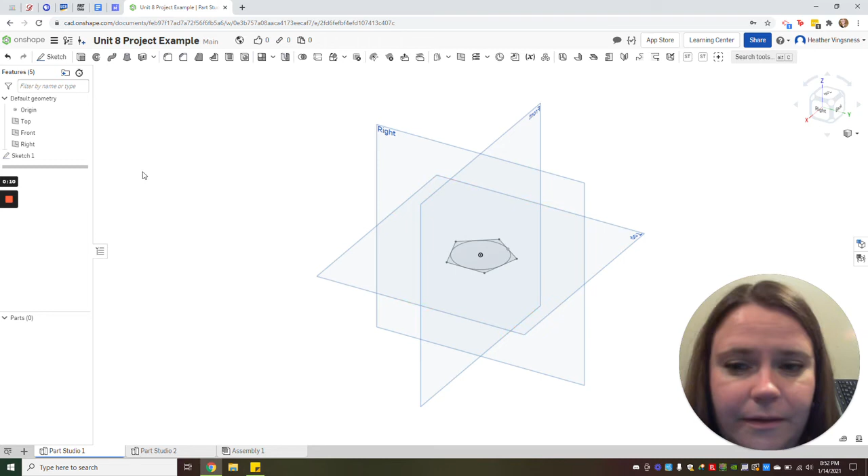Hello, I am creating a simple mold for a hollow toy. So I have this sketch right here, and I'm going to finish creating my toy. I'm going to extrude this object, and one of the things I want to make sure when I extrude it, I'm going to do so symmetrically, so that this plane right here is right in the middle. That's going to make my job easier later.

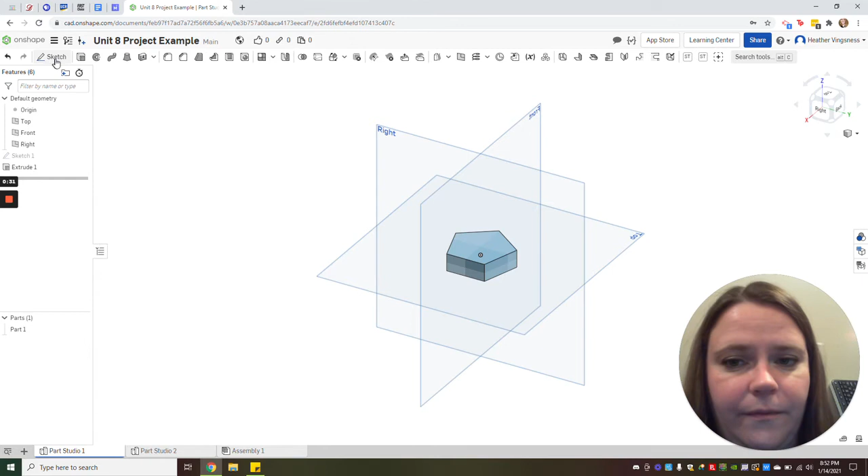My whistle right here is about 1.5 inches long and about 1/2 inch thick. I am going to create just a little mouthpiece right here, and then once I have my whistle, I can show you how to create the mold. You don't have to use this toy. You can use any toy you want. This is just an example.

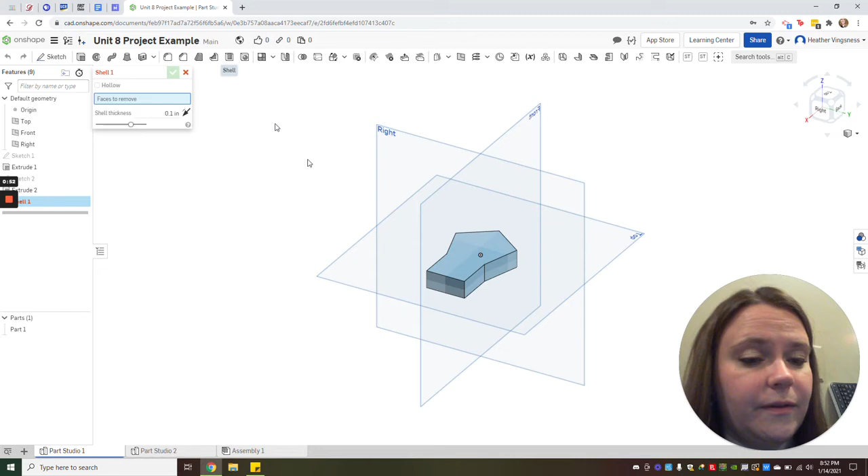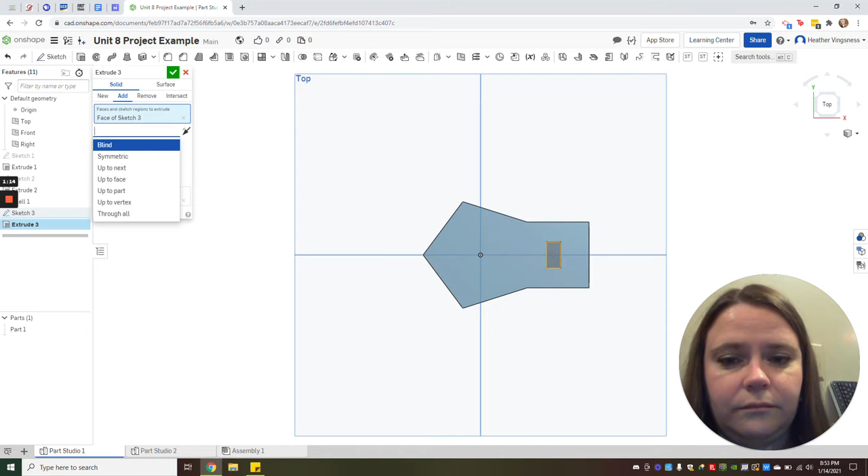So one of my requirements is that the shell thickness is about 2 to 4 millimeters. So I'm going to type in 2 millimeters. See what it looks like. Looks pretty good. To make it a whistle and to distinguish the top from the bottom, I'm just going to draw over here a little hole that you can blow through. Just go like 2 millimeters thick. Remove. There we go. Alright, so you can see there's this little hole in my whistle.

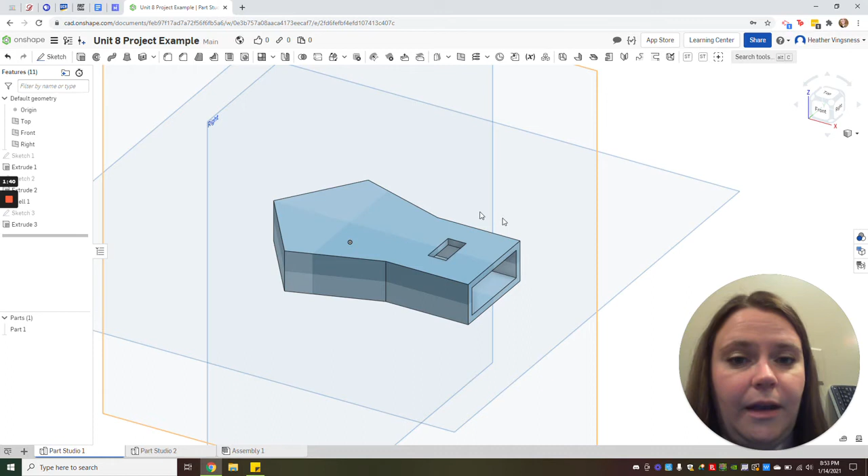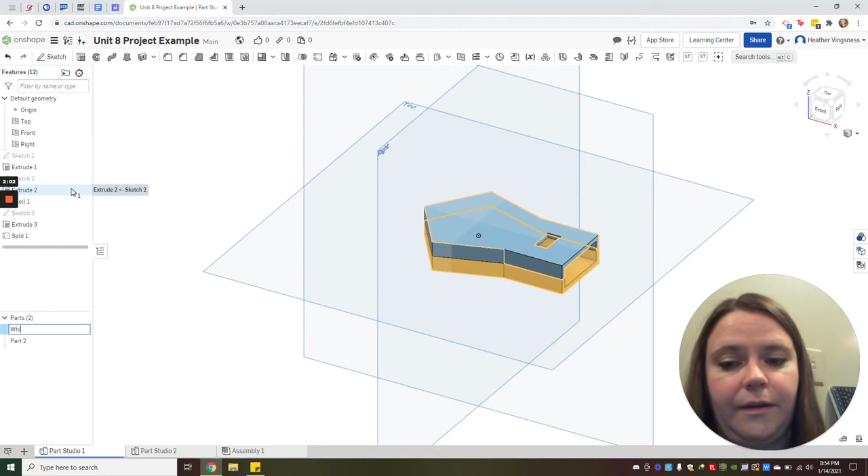Alright, so I want to split the whistle apart so I can add a rib. This is the split button. I'm going to split this whistle along this axis, which is the advantage of extruding it symmetrically. All I have to do is click this axis to split it along. And now I have part 1 and part 2. I'm going to name this part the whistle bottom, and this part I will name the whistle top. If I hide the whistle top, you can see the whistle bottom.

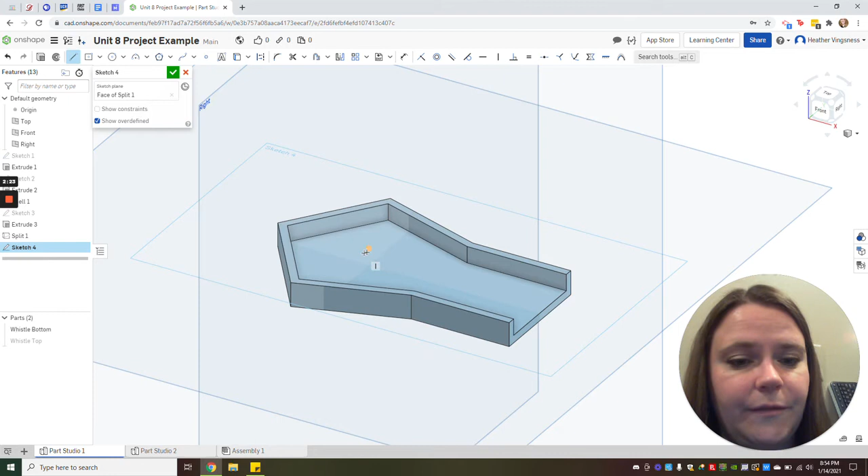So here's where I'm going to draw my rib. I'm going to draw a sketch right here along this plane, right here maybe. Since I've drawn it on this plane, I can actually use this sketch to make both ribs. So I'm going to click the rib button. I'm going to go normal to the sketch plane so it ribs down, and extend it so that it goes through the whole object.

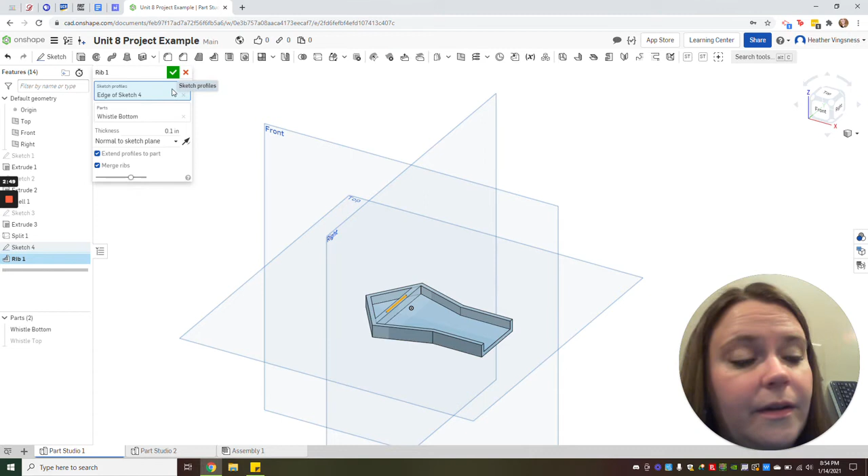The thickness of the rib has to be between 60 and 80% of the wall thickness. So I'm going to make it 1.2 millimeters thick. You can see it's really thin right there. Perfect. And then I'm going to turn this sketch back on. Now you can see the little line I drew.

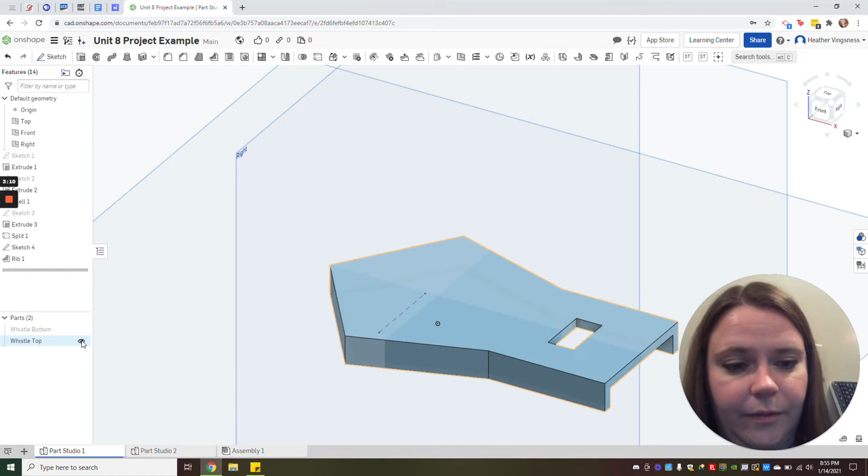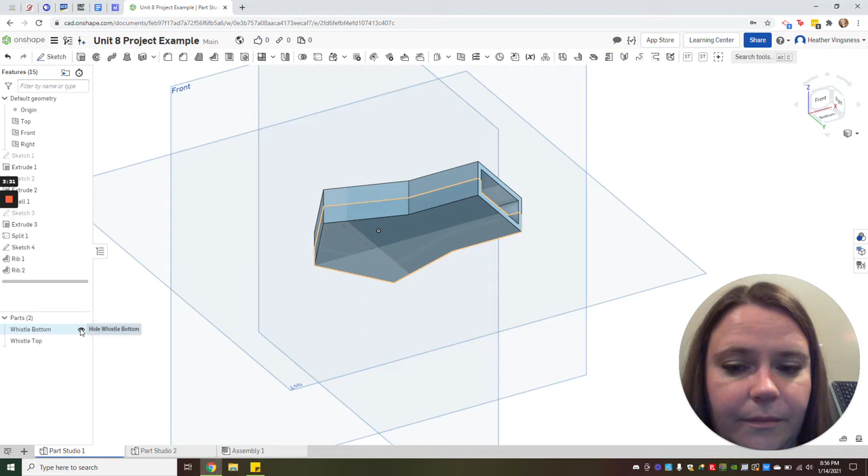I will hide the bottom and show the top. And you can see I can now use the same sketch to make a rib in the exact same place on the other half. So I'm going to click here, make it normal, make it 1.2 millimeters, and extend. And if you look, I now have a rib in exactly the same spot on both halves. Nice. Alright, my next step is to make a mold for this half, and then a mold for that half. So I guess I'll start with the bottom.

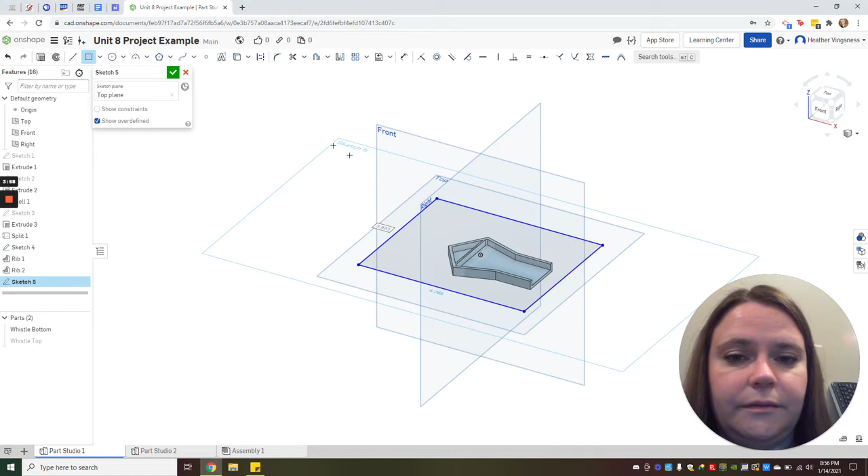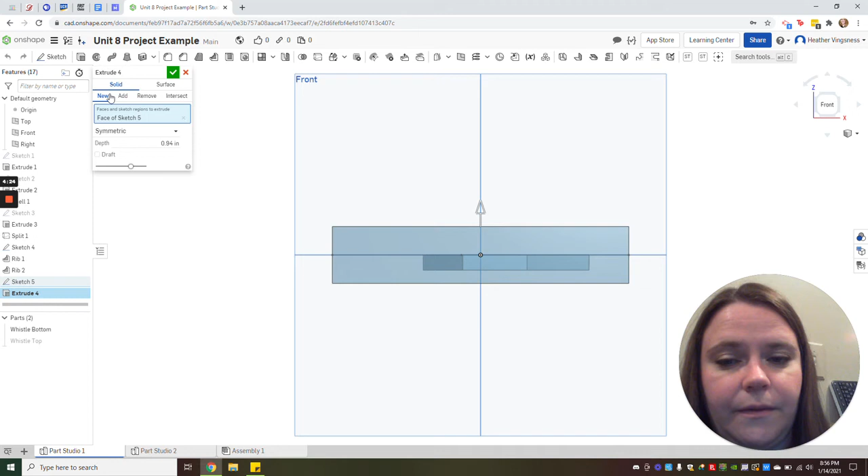I am going to start by drawing on the top a rectangle that is bigger than my shape here, and extruding it in both directions. I want to make sure that this object completely covers my shape right here. Awesome. Oh, oops, I want to make sure that is a new part. Okay, so I have a third part right here. I'm going to rename it mold of whistle bottom. Perfect.

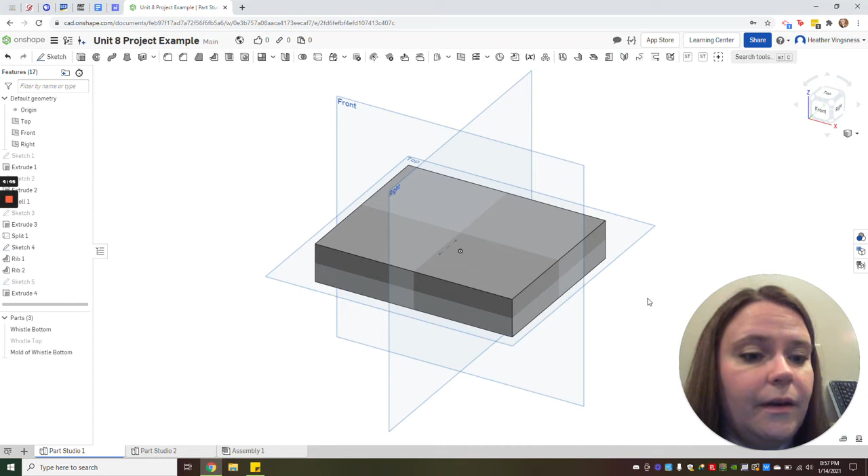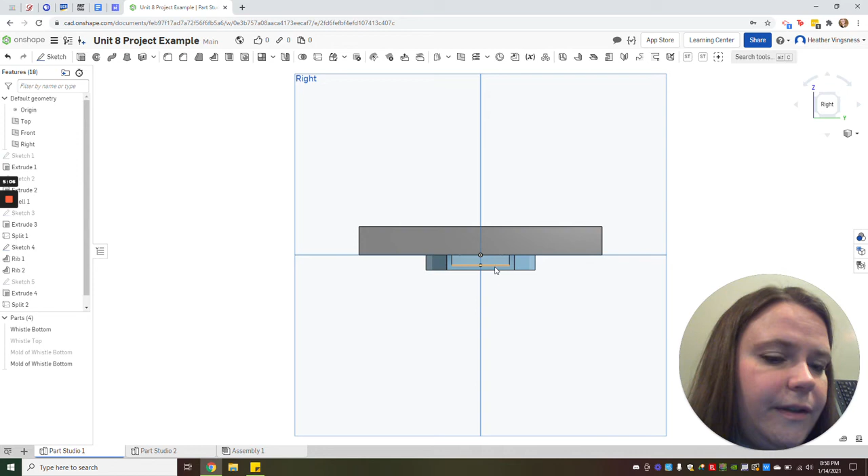So next I want to split this whistle bottom mold in half to show the two sides. You might be tempted to simply split it in half right here along the middle. But you'll notice that when you do that, one of your molds looks like that, and the other mold looks like this. Not very satisfying. When you split it, you actually want to split it along this surface right here.

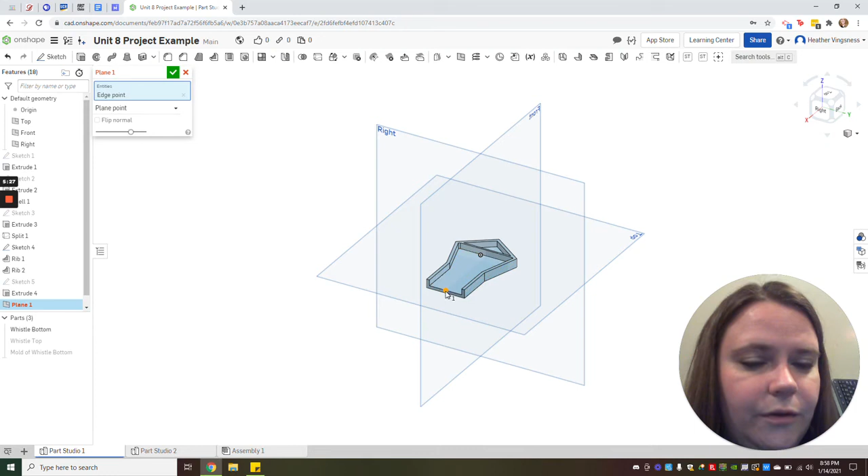So I have to delete this split, and instead I need to draw a plane to split along. So I'm going to draw a new plane through this point right here, along this surface. I'm going to choose a point, and then choose a plane to make it parallel to. And you can see I've created a new plane right at this level. That's where I want to split my whistle bottom.

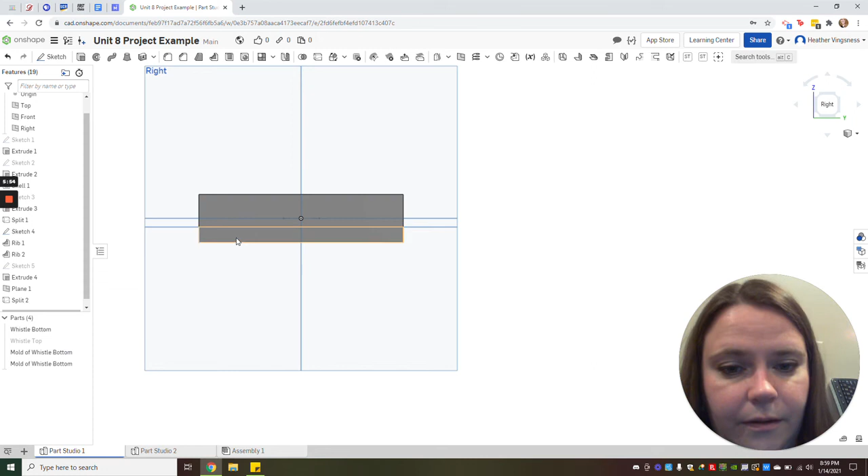So when I go to split, I will choose my part, and I will choose my plane. Check. So you can see the two halves are uneven right here. But now when I look at the two molds, you can see the two halves where they're gonna go.

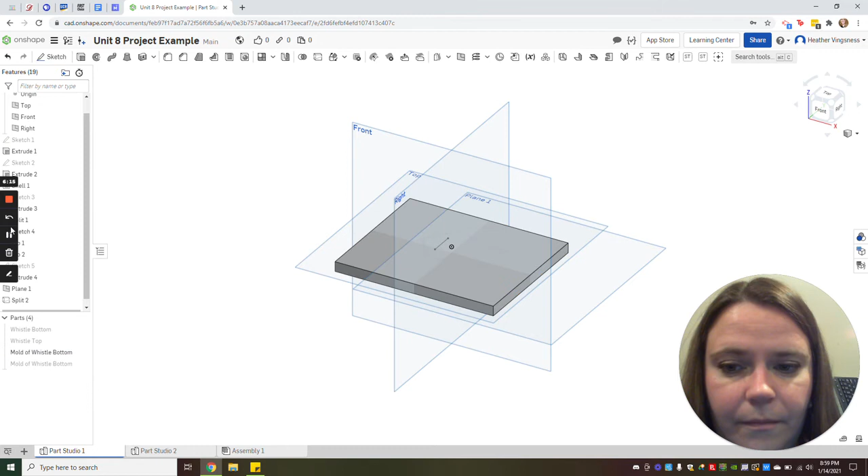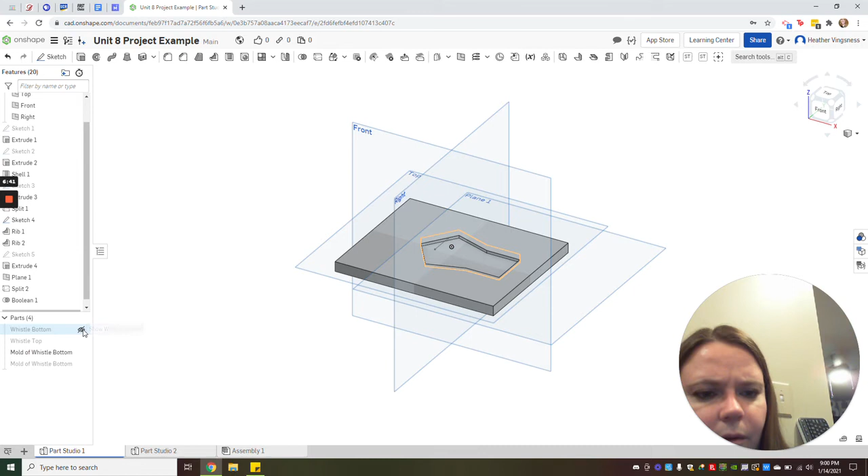I just realized you can't actually see the indentation because I forgot to make it. So I have to go here, and subtract out the whistle bottom. Oops, that's the tool. The whistle bottom from the mold. I want to keep the whistle bottom. Check, and now you can see the little indentation it's made. Then we have to do the other side here. So now we have to subtract the other side.

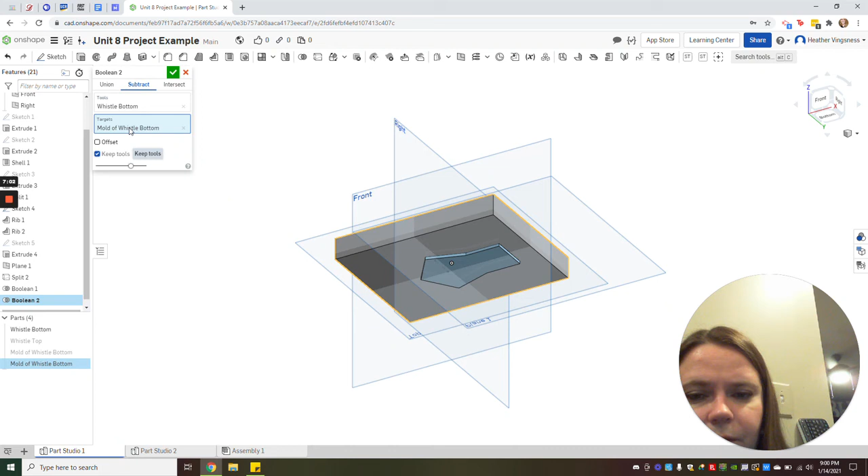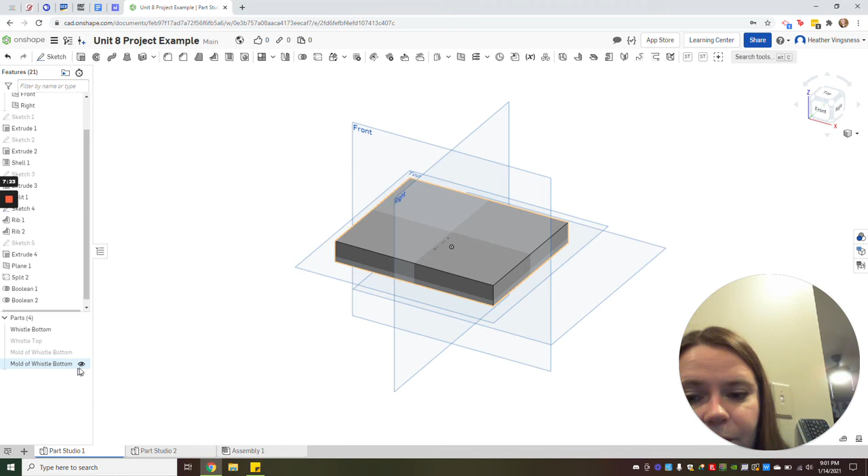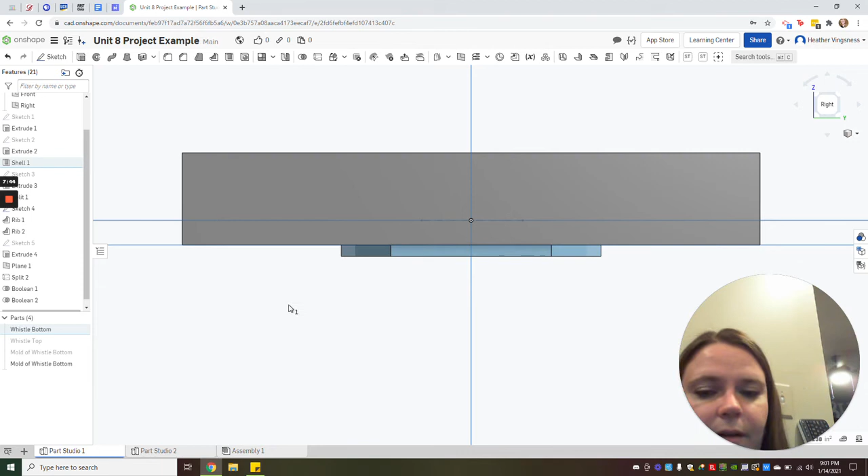So I will choose the tool, which is the whistle bottom, the target, which is this piece, and we want to keep the tool. Check. So now you can see we have the two halves of our mold, one that looks like this and one that looks like that. It is important to make sure that the mold was split along this plane here, because otherwise this half of the mold right here wouldn't make the bottom, and this half wouldn't make the top, right? You want it to line up and fill in here so that there's no gap in that area. It's very important you split it in the right spot.

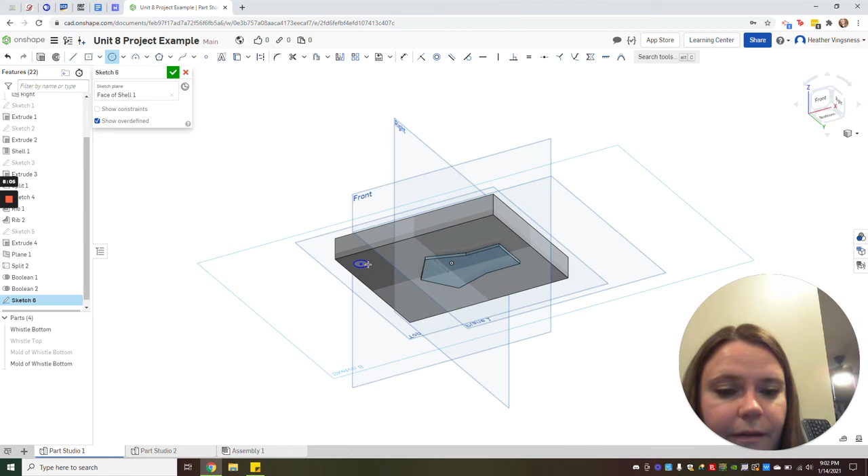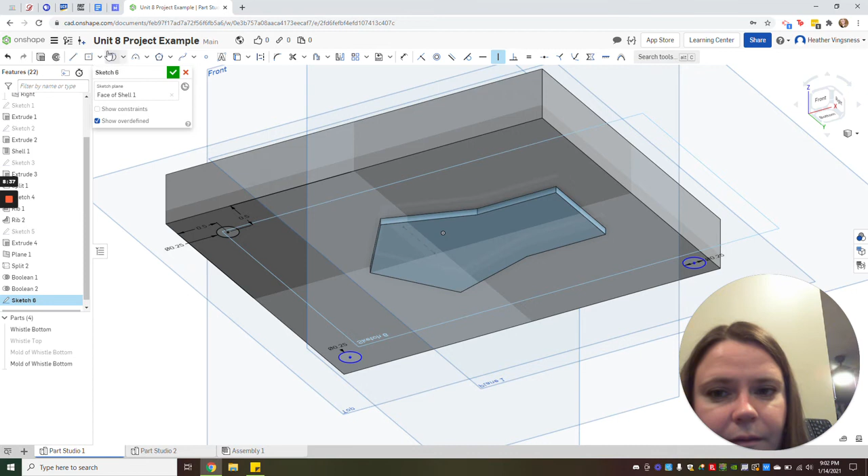So our next step to make the mold is to create the little pegs that connect them together. So I'm going to draw on this surface a few circles. I'll make them, I don't know, 1/4 inch. Their size and location is not important, just that there are 4 of them. And I'll line them up along each corner, just because I like to make sure things look neat.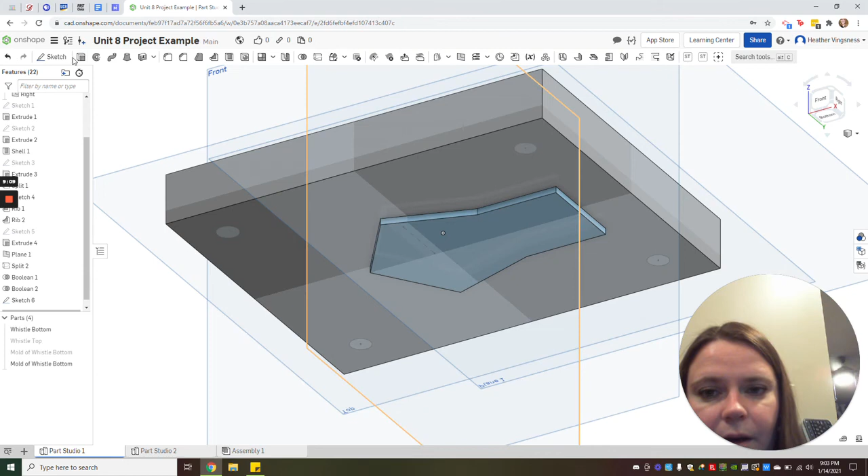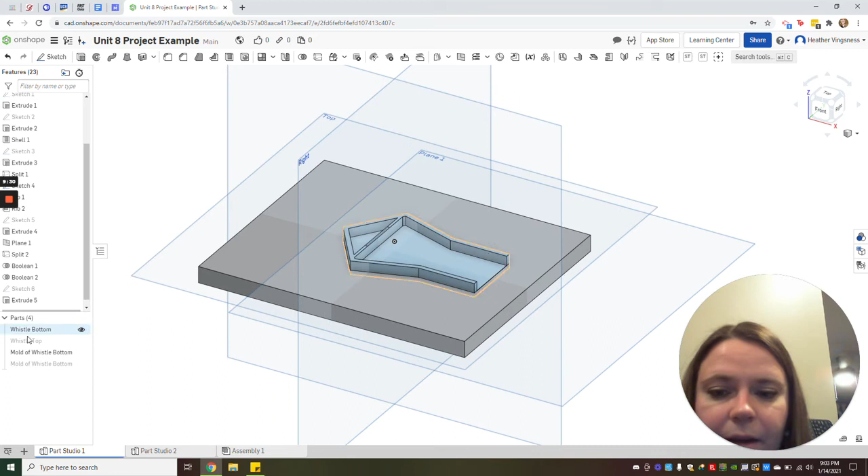Awesome. Now that I have my 4 pegs, this sketch is important right here. I'm going to extrude them on this surface outwards just a little bit. But I want the other half to line up. So as I hide this and reveal this, I want to make circles in exactly the same spot. And the easiest way to do that is to just turn the same sketch back on. And on the other side, where there were pegs, you have to make holes the same depth. So since I made them 0.25 on the other side, I got to make my holes 0.25 deep on this side.

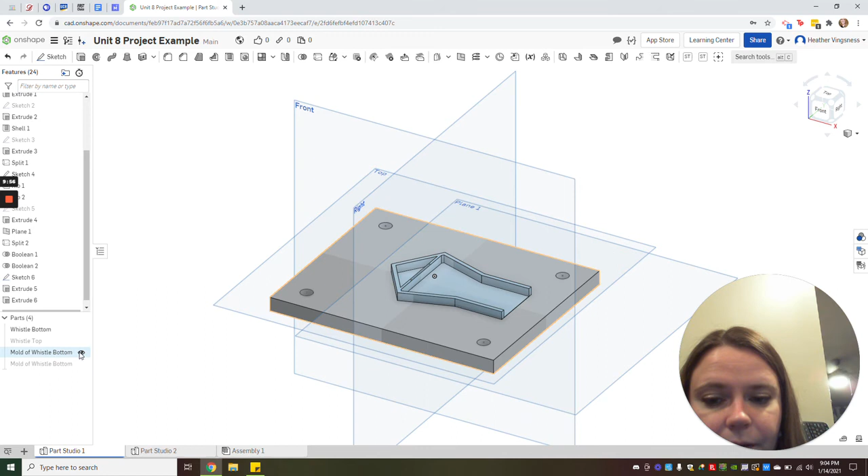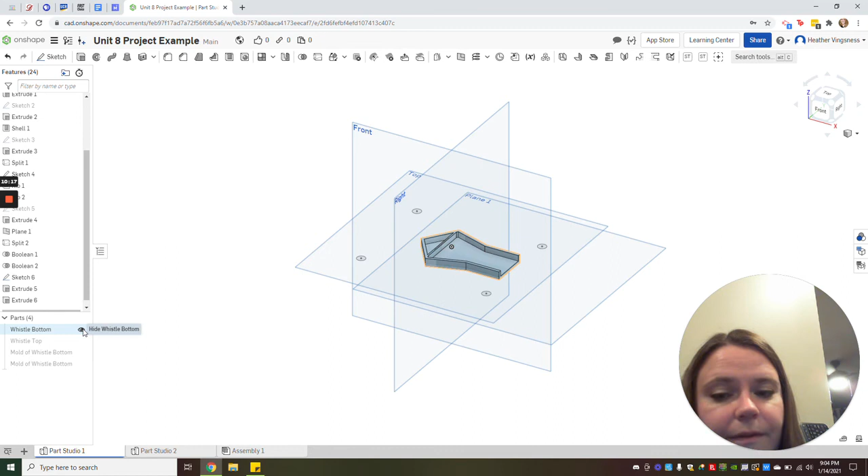And there you have it. You have this mold of the whistle bottom. And then you have this matching mold of the whistle bottom, and the whistle bottom fits perfectly inside each half. Nice work. Our next step would be to repeat the same process with the top of the whistle, because the mold we made of the bottom doesn't have that little hole. So we have to repeat this process with the top of the whistle.

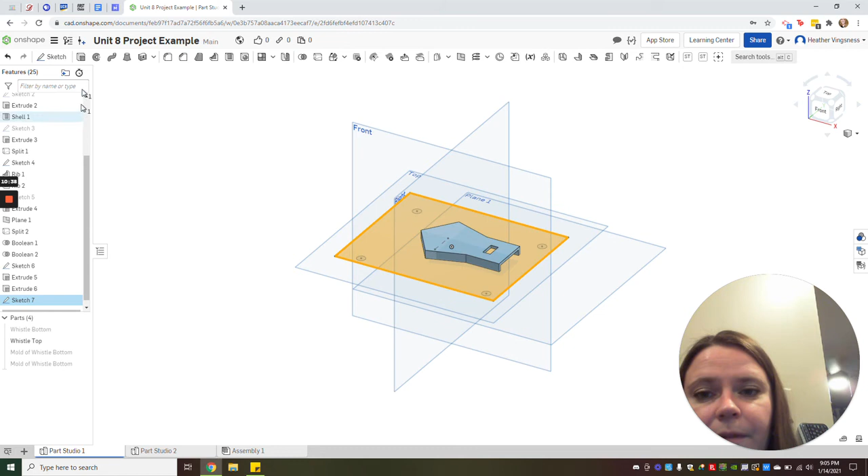So we have to draw on the top plane another rectangle. You could even use the size of the existing rectangle if you want to save yourself some work. You can extrude it in both directions again, making the whistle top in the center, making sure this is a new part. You can name it mold of whistle top. And then, yeah, repeat the same process.

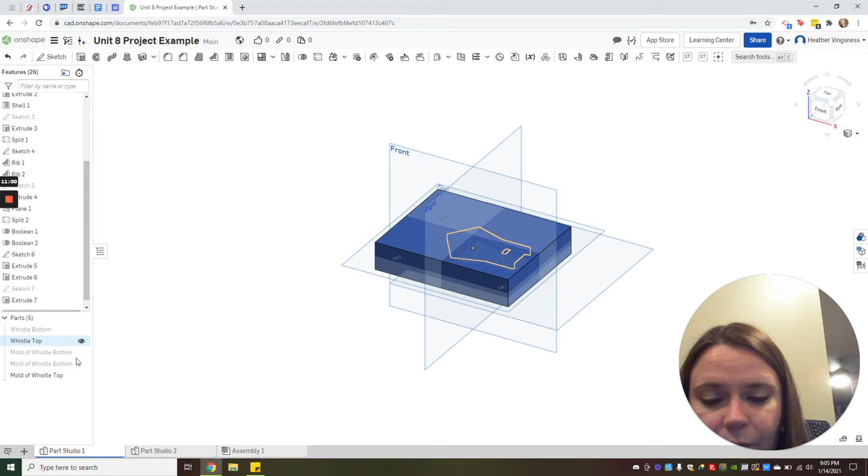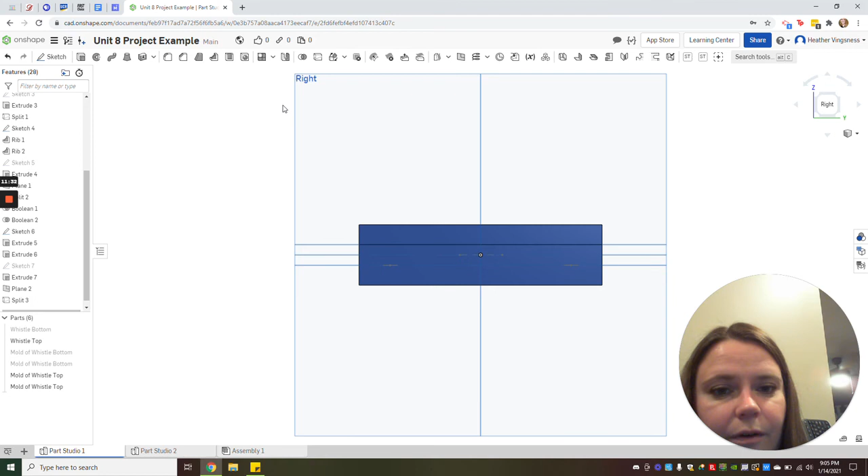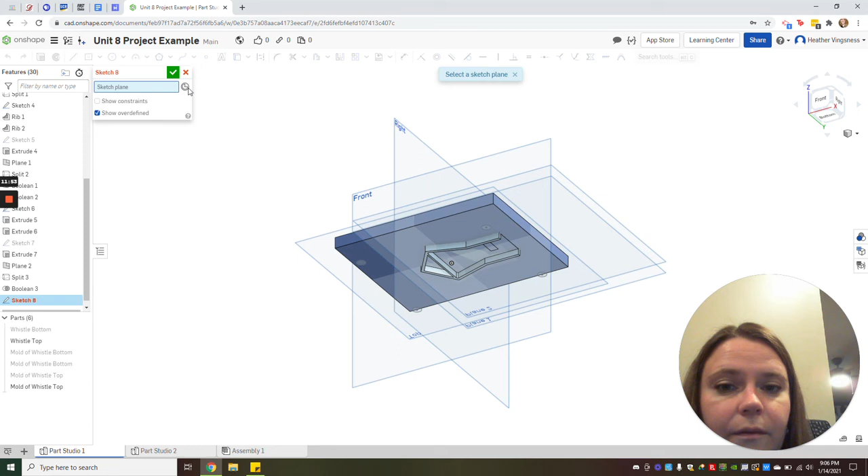You would find out where the surface of this top is. You would draw a new plane through this point along the top surface, creating a new plane right here, if you see that one. So that's where you're going to split the mold of the whistle top, right on that axis. So I'll split it with this plane right here. Then I will subtract. So grabbing my tool, which is the whistle top, the target, which is my mold, keeping my whistle top, repeating the same process for this side. Oops. There we go, got my second mold.

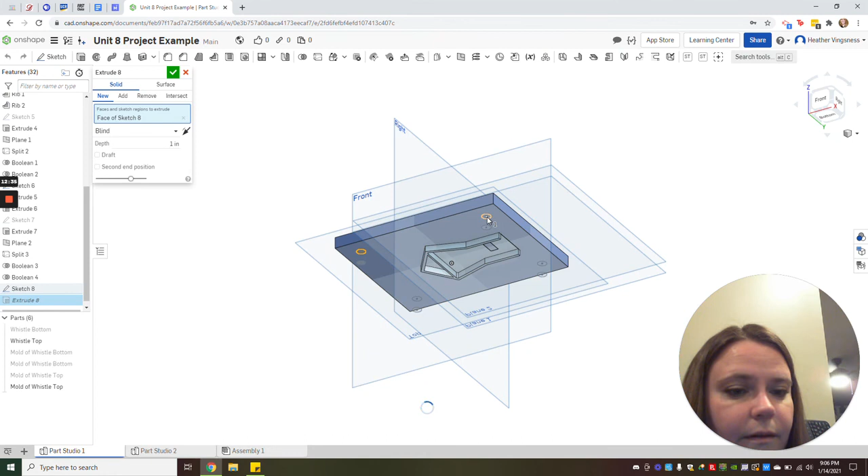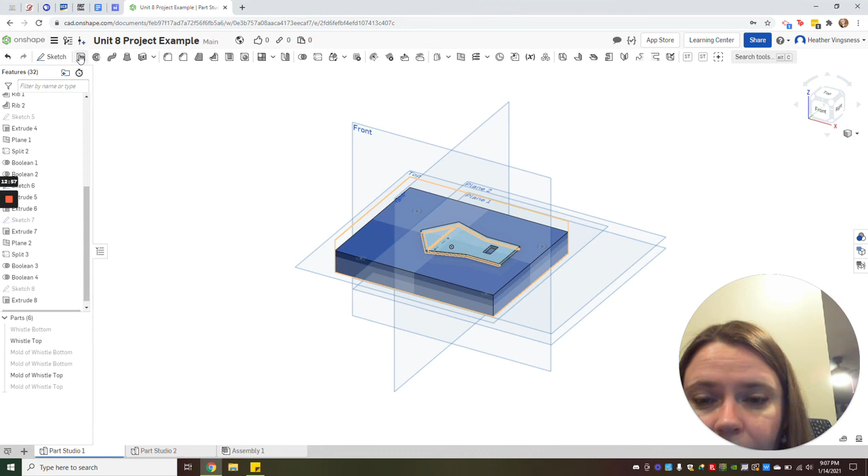Adding the new circles. I'm going to put the circles in the same spot. So I'm going to draw a new sketch on this plane. I'm going to use these circles again, so I don't have to draw and measure new ones. I'm going to extrude these circles on my next mold. 0.25, just like last time. And I will remove the matching circles on the other side. Turning that sketch back on so I can grab them.

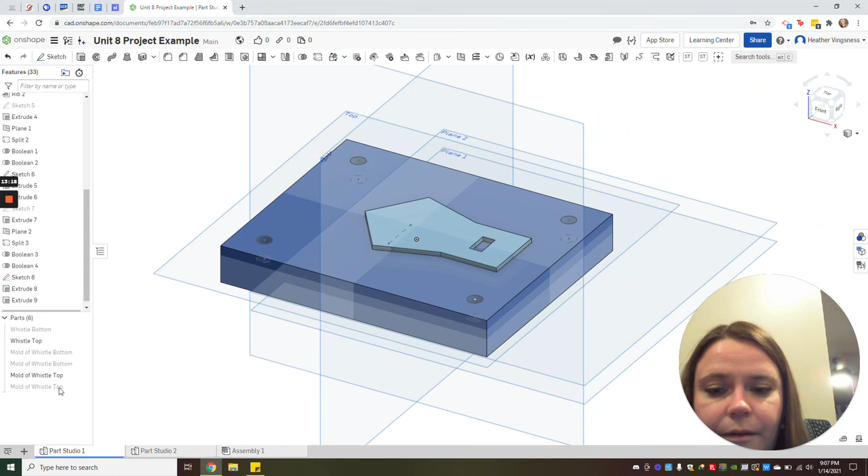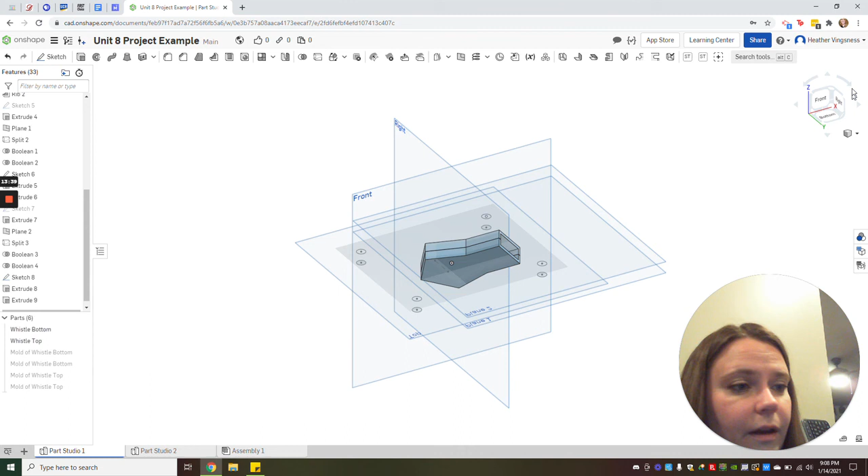Voila. There we go. Now we have the two molds of the top. Here and here. Their pegs match. And then we have the two molds of the bottom. And we have the top and bottom of the whistle, all 6 parts. If I want to, I can go through and make my whistle a cool color, make it look awesome. Try this with a different object even. But this is the process of making a mold.

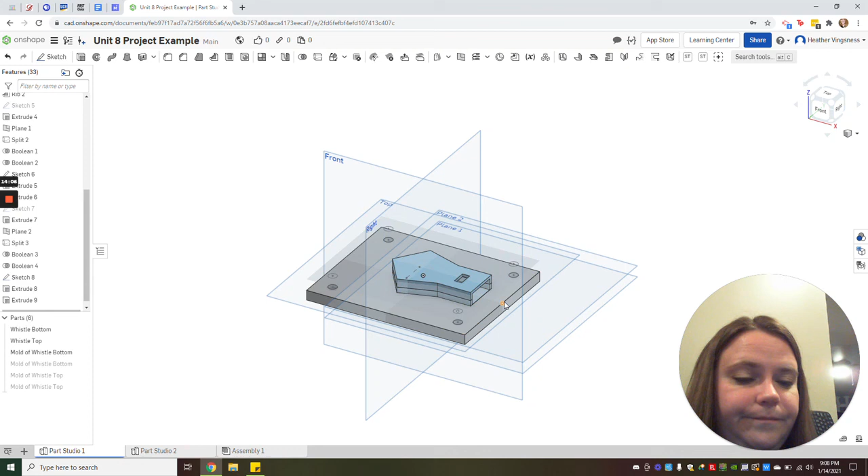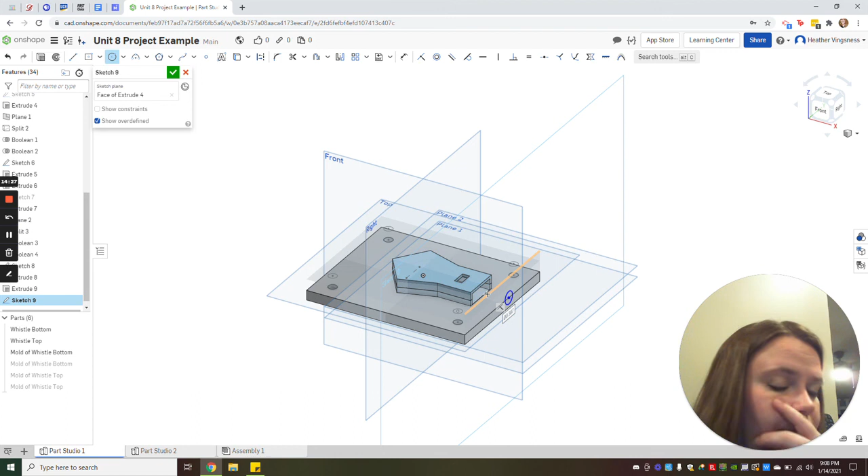Oh, I forgot the hole. Last step. You want to put a hole for the plastic to go into. Right? Otherwise if you try to pour the plastic in, there's nowhere for it to go. So I actually want to draw a circle on this surface right here at the crack. And I want to have it go into my shape to this depth right here, so the plastic will fill inside the mold.

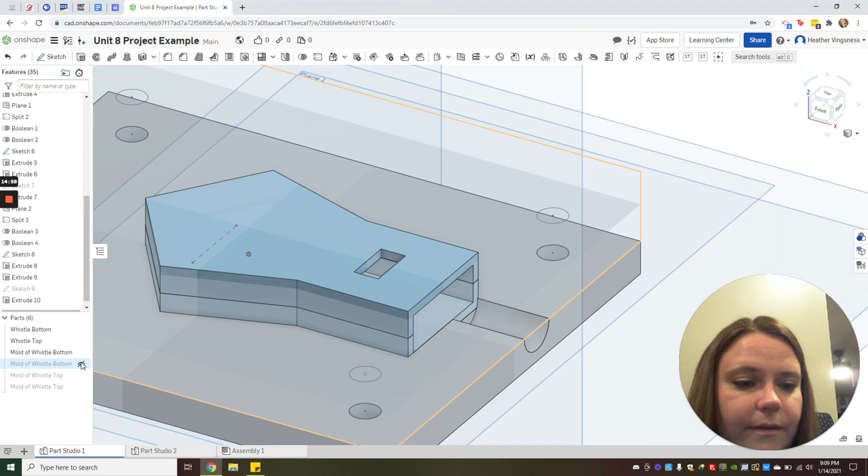So when I click extrude, I want to make sure that I extrude this up to this face, so that I remove exactly the material that we need to get to that spot. So that's perfect. That's exactly how much material we need to remove. So now you can see that there's a little channel in this half that reaches through perfectly to the indentation of our shape. Just what we needed.

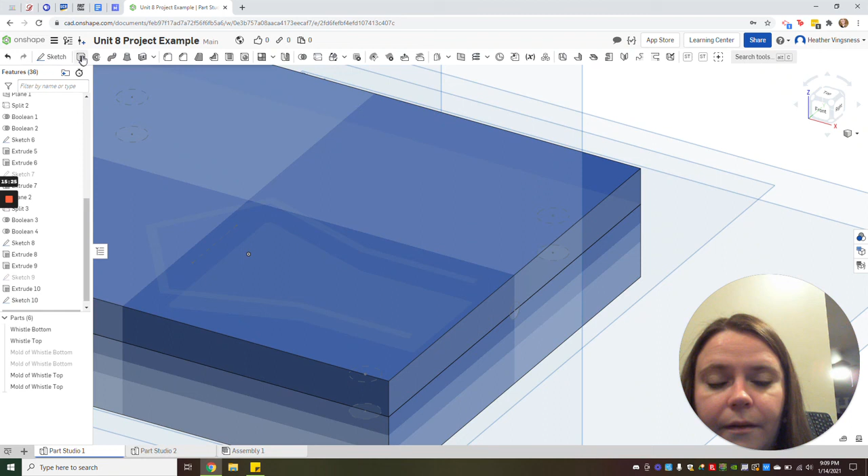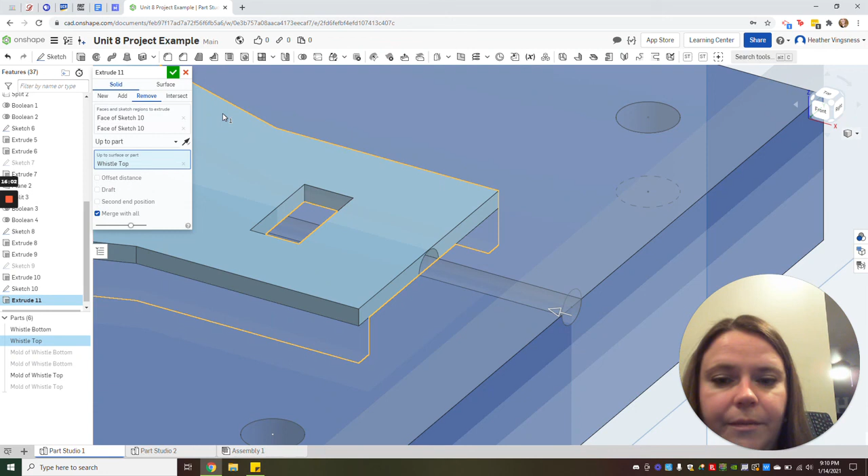And I will do that on the top of the whistle as well. I will draw a circle. Check. Extrude this circle. Remove. And I want to make sure I remove it up to this surface. Come on. There we go. Perfect. Up to that part. Yeah. So now I have a hole.

All right. Our whistle is done. We have 2 halves of each, and we have 2 holes. Nice work, dudes.